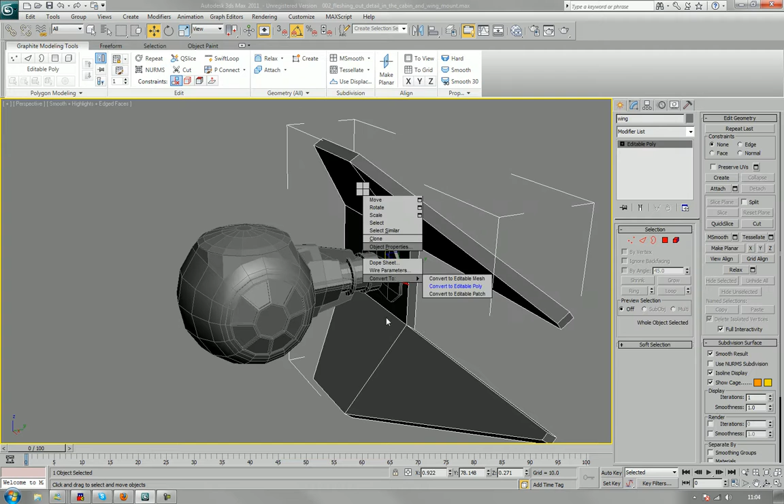Now then, what I'm going to do is hide this, and use this as a base plate for where I want the thing to reach, rather than building it off this.

I just want to look at this, because this part here is too high up. It needs to be brought down, just in line with the rest of it.

There. Slightly better. Now I can work again from this. Now there's a couple of ways I can do this actually. One of them is just to really duplicate what I've got over here.

So let's see what I can do. Shrink.

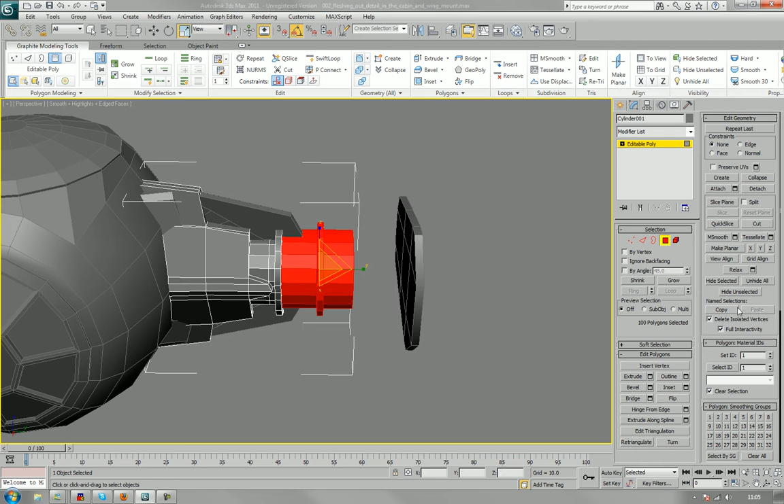It's actually quite a clever design, you see, this thing when it comes down to it. It's these two parts, just repeated.

Okay, so I'm going to shift this 90 degrees.

Incidentally, that's what most 3D modeling is. Blatant cheating. Oh yeah. And Zap Brannigan impersonations, obviously.

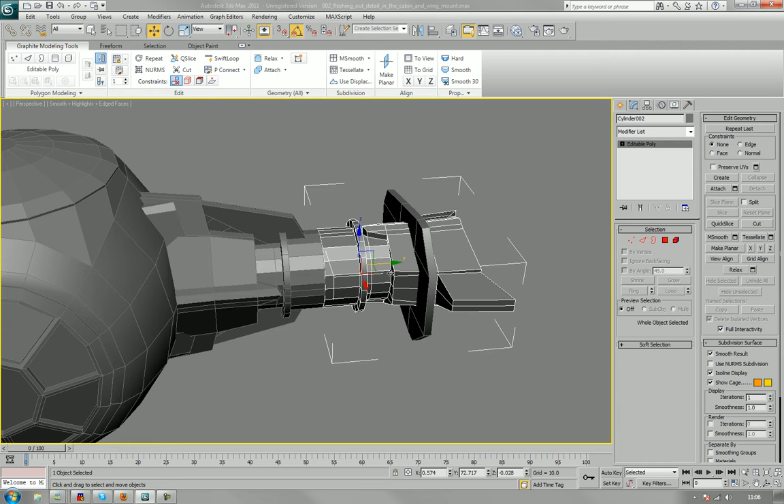Now I'm going to get rid of all these parts here, because what I can do then is just literally bolt these two parts here together, or even just make it into a sliding attachment if I absolutely have to.

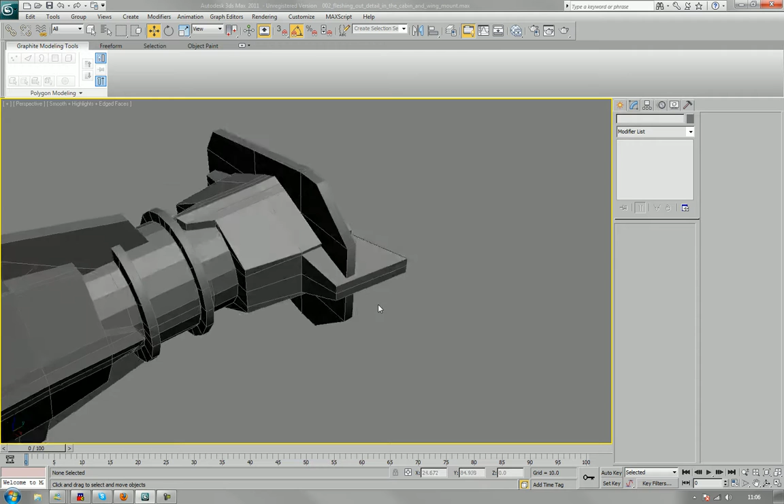Okay, now top viewport. What I'm going to do is just clean this up a little bit. So let me see.

I could do a slice plane, I suppose. For that to work, I need to select all those, and get my slice plane tool, which I rarely use, but it is massively efficient.

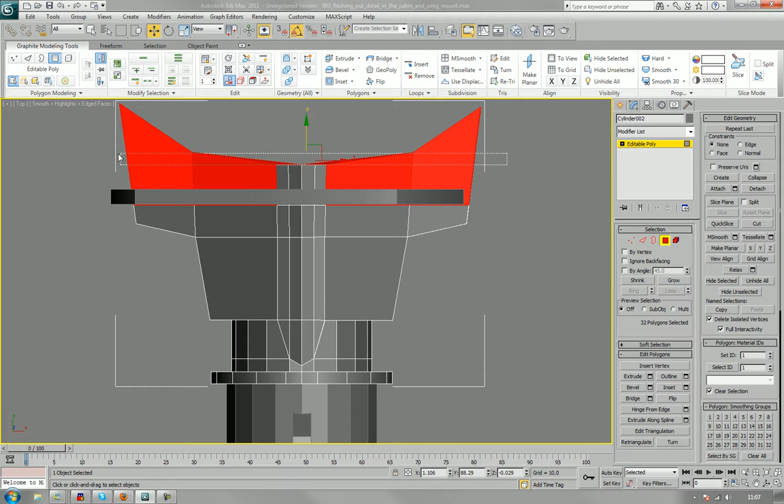Bring it to round about there, and just click slice, and turn it off. Then just get rid of all these leftover parts that are now useless. And ta-da, as they say.

Now then over here, I'm going to do a bit more tying up work.

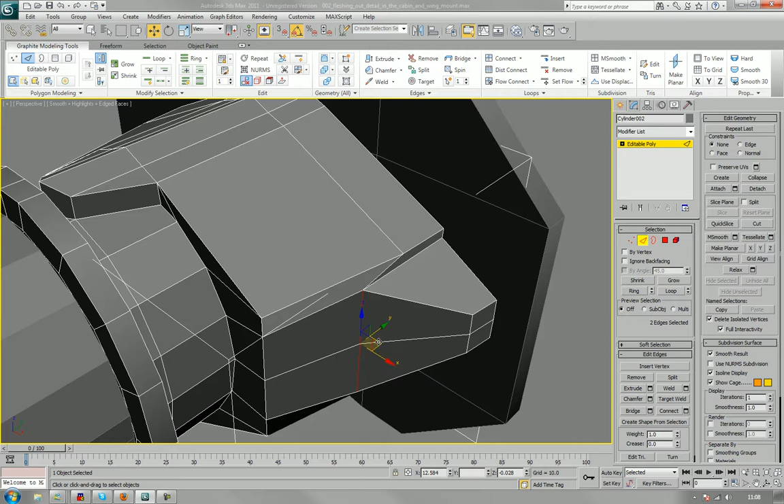Good thing is, I suppose, that you can go, oh no, this is a Generation 1 TIE Fighter, or this is a Beta TIE Fighter from... Just make something up. The only people who are actually going to notice or care will be rabid Star Wars fans. Unfortunately, there's an awful lot of those in the 3D industry, however. We all have our crosses to bear, I suppose.

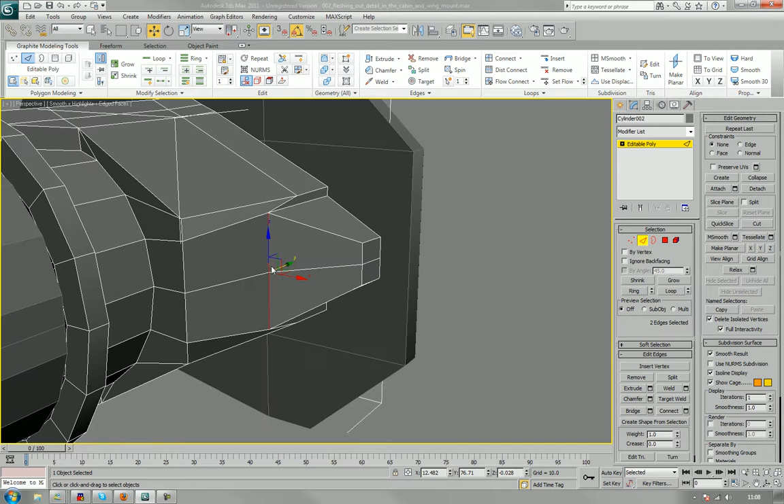That's right about there. Now, the thing is, if I move this forward, which I just have, the choice is either to inset that into there, but if I do, I've got to move that vert, or I'll do both sides together because it's fun.

I can move that to about there. Then just scale them in this way. And if I do that, I don't have to repair this part.

Because it still works. Yeah? Yeah. Good.

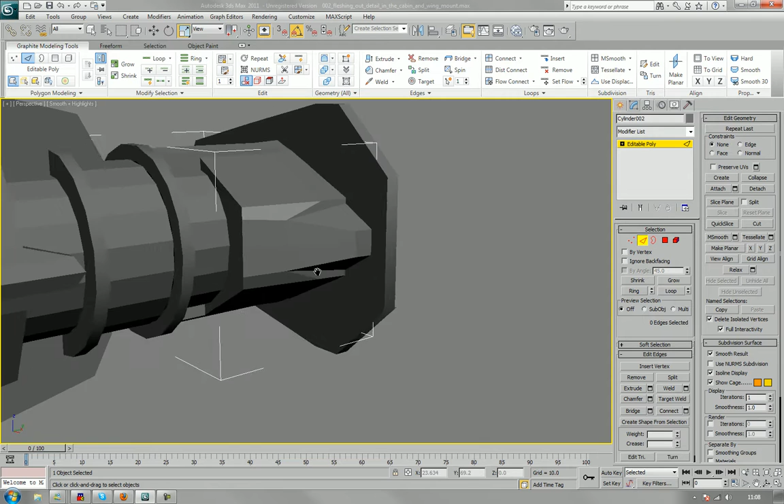Although what this does mean is I need to steal these parts here. So I'll just flip them 180. And then without holding shift, just 90. And then just flap them into place just down here.

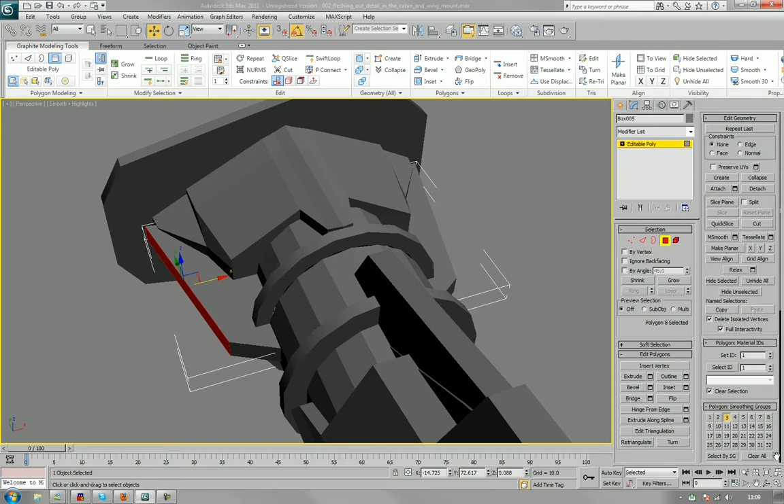Like so. Now, if I attach these two parts together, and I may as well, to be honest, I can then move this one into here. And this one here. Like so.

Okay, let's check these shapes out. Dem's some good shapes.

Now then, delete that and go down here. Now, obviously this is an open shape, so what I'm going to do is grab here.

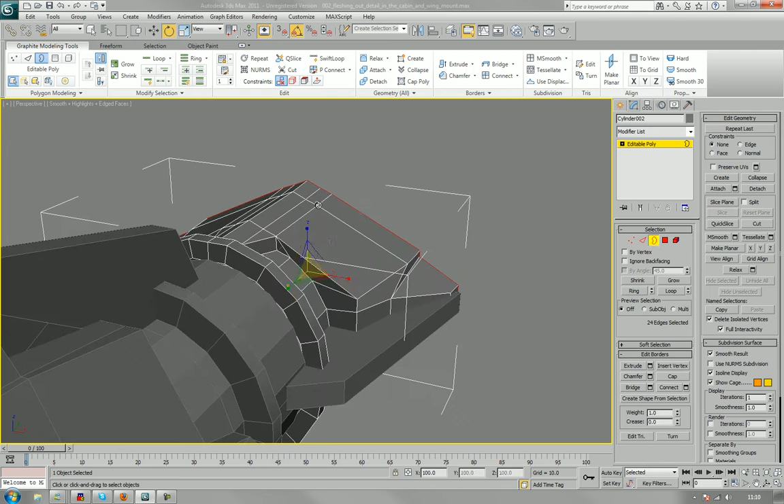Go to my correct tool, scale, there we are. Just going to bring that in like that, and then like that.

Okay, and this will allow me to do a bit more building that I need to do.

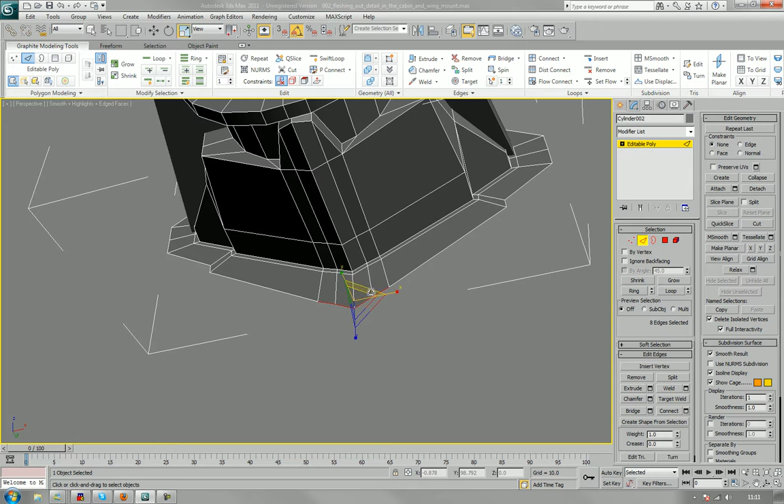Use Alt to deselect. I didn't like that method at first, where you have to use one key to group select and one key to group deselect. However, I actually really rather like it now. So, go figure.

How many polygons this will be when I finish? I haven't actually set myself a target, considering this is more of a kind of let's have fun modelling stuff set.

Okay, now over here, let's go straight into build mode. I could just use modelling mode, but I just prefer doing things this way.

I mean, extrude mode rather. Because it gives me slightly more control to be able to do things like that.

You want a very small extrude there. There we go. That gives me those shapes, which as you can see are kind of overhanging there, which is what I wanted.

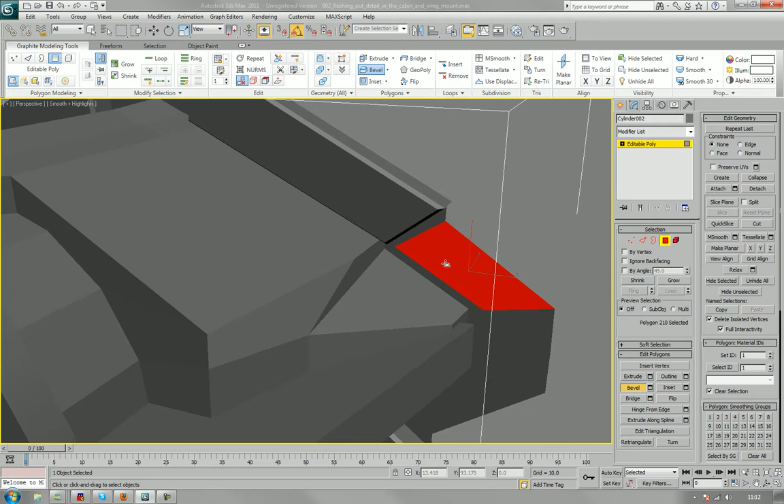Okay, now back over to here. Take these parts, there and there.

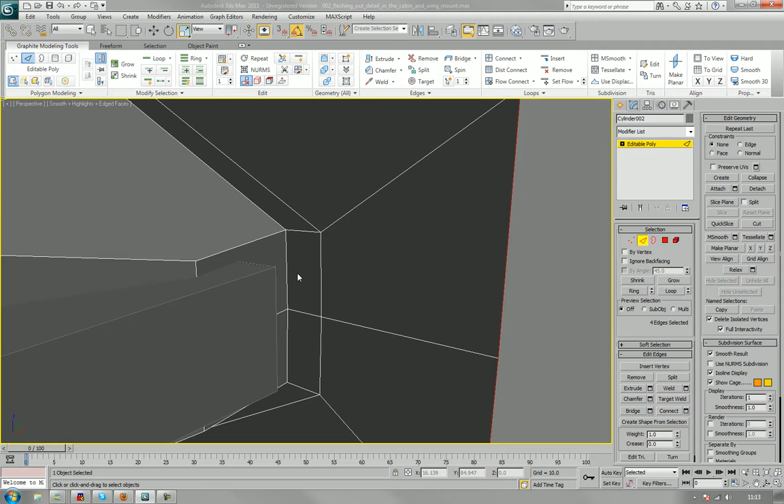Now then, what I can do here, just for some pure variance as much as anything, is go across there and do a connect. I'll do it on both sides, in fact.

Now it should connect in the middle. There we go, it did. Like so.

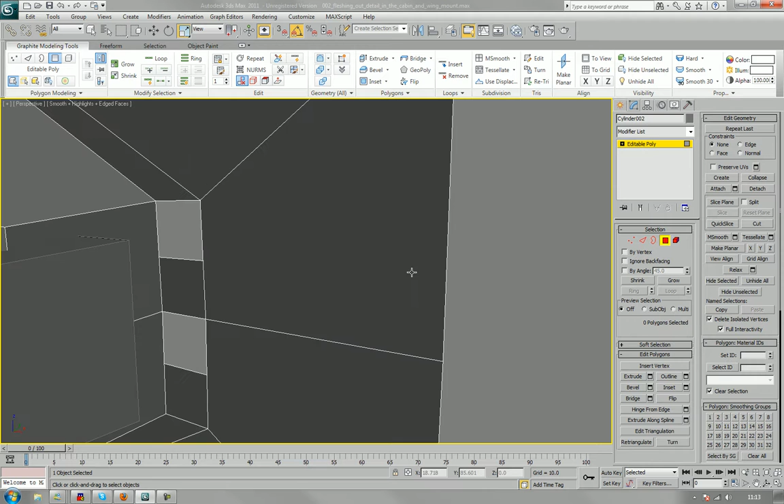Now then, depending on how straight these edges are, this will either work or not work even remotely. So let's find out, shall we?

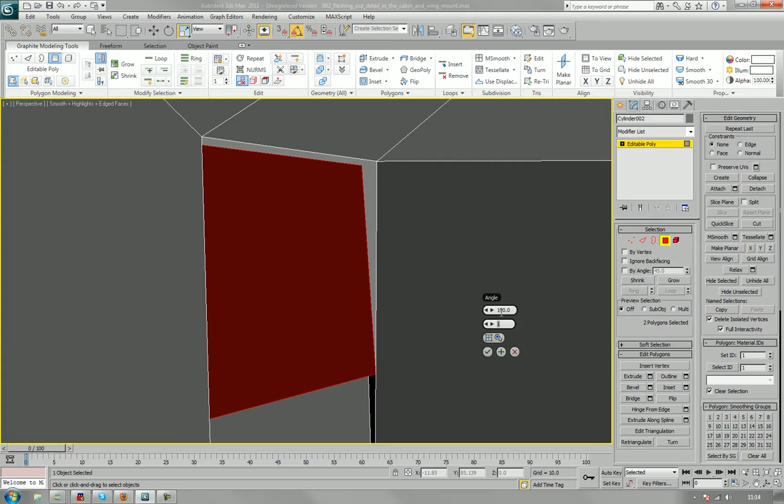And I'm going to use maybe 6 segments. Yeah, not especially straight. But that's okay, we can get around that too.

Delete these back ones off. Oops, deleted them all because I didn't click tick, because my caddy had wandered off.

Alright, now target welds.

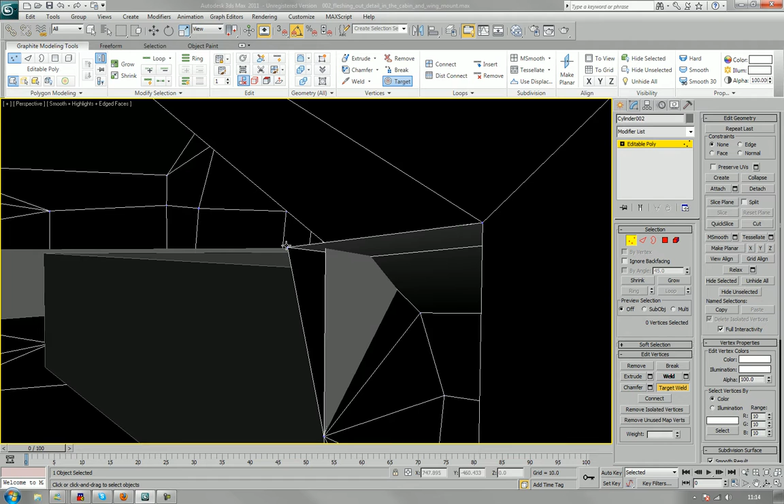Intriguingly, this one seems to be a lot more straight than the other one does. Or does it? Haha, no. Oh, dearie me. Oh, you. Never mind. Let's just undo that part altogether, shall we?

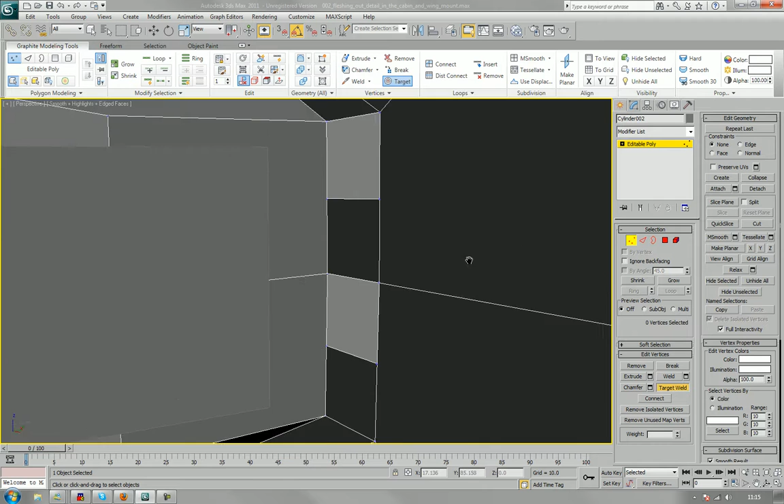In that case, we'll just use a simpler method of doing this. I'll leave those there anyway. Cylinder, just use the standard poly on poly method. Drag out.

Let me have a look. It's too many polygons there, so bring that down to about 8. Well, 90 and then 90, not 180 rather.

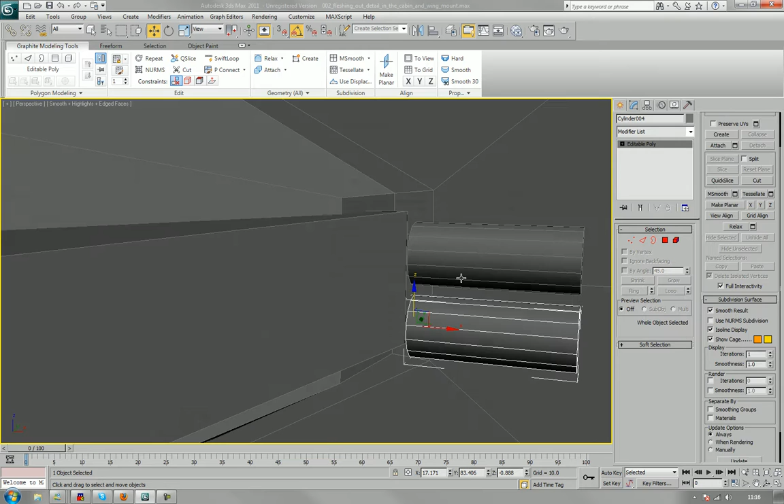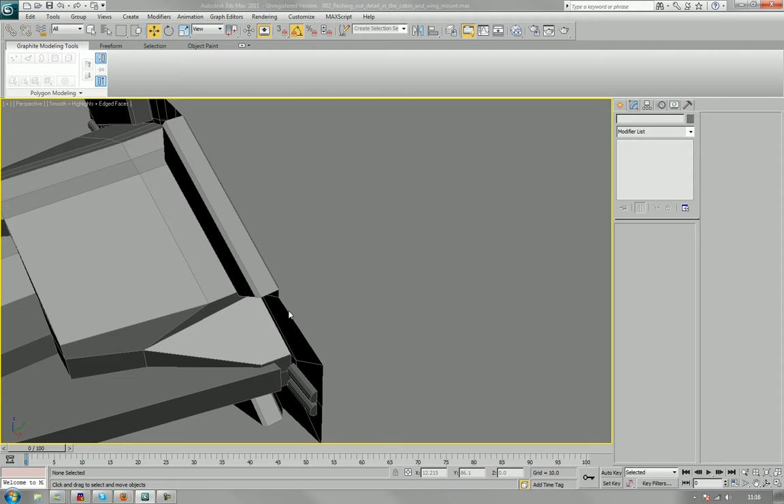An awful lot of busy stuff tends to go on in these models anyway. There we go. Now then, grab these and just shift it back again to there.

And don't be put off by complexity, like I say. These things are here just to make us better artists rather than to interfere with the fun you're having.

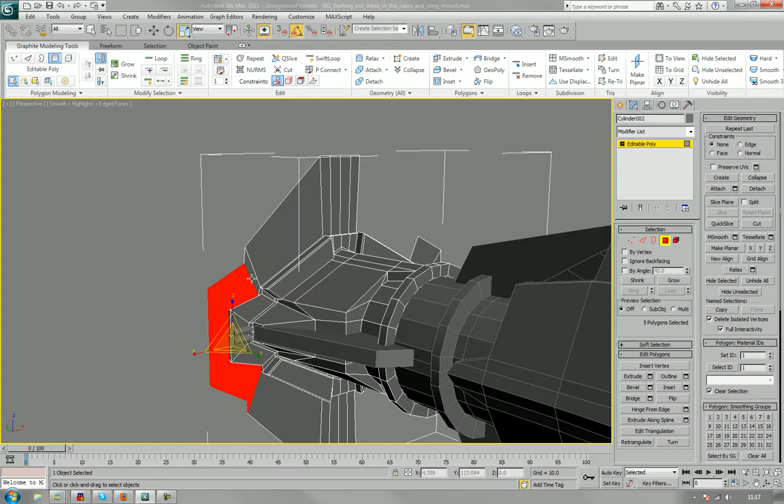So I'm just again looking at this shape, just bring it up a bit like that, just there. Now I need to clean up some of these edges, because we don't need all of them. Get rid of those ones, and these ones. Start straightening pieces in.

Moving to the point now where we're going to need the wing. See what I mean? Becomes kind of important at this point, because now we can see how this part is going to fit onto this part. And if these bits are too long, which at the minute they are, then we need to adjust them, like so.

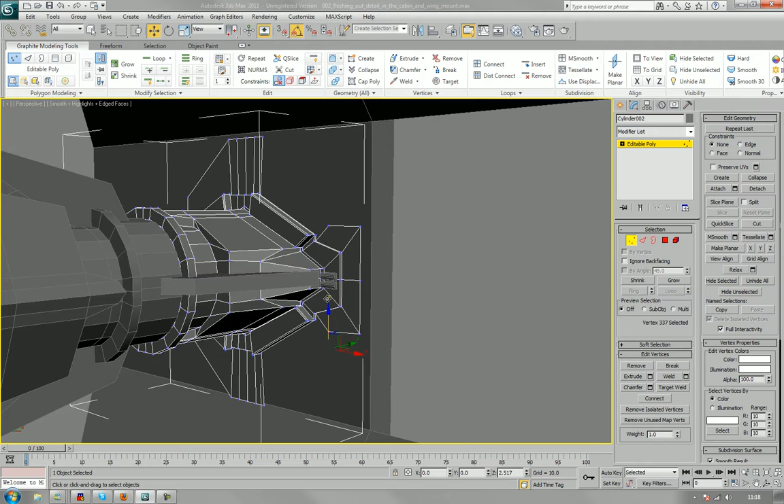Alright, now then. The part goes there and there. And let's look over here at this part, which I'm going to chamfer to give me that shape.

I'm not sure that shape's actually going to work for what I want, especially when I'm being stupid and can just delete these parts. Thought so.

Target weld these into here, eventually. It seems to be becoming a longer and longer process to target weld this into here. That's better. Right, we've still got these kind of bat ears going on.

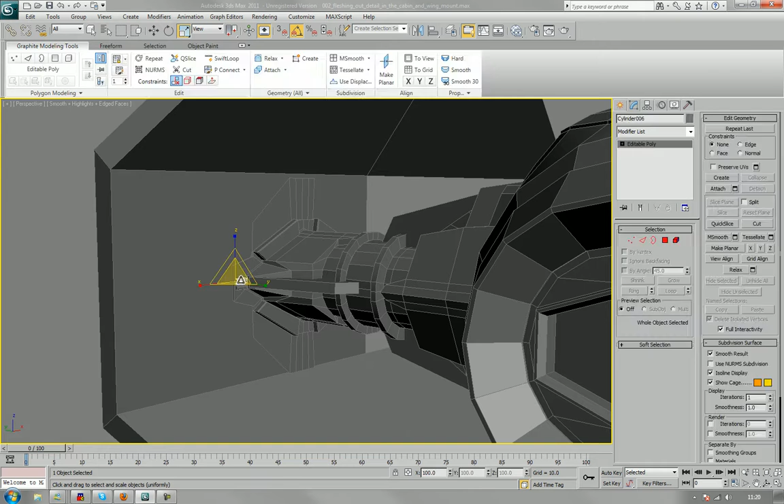Yeah, that should do. These parts here, I don't like. It's funny, I spent all that time making them and I hate them now. I want to make ones that are much better suited when it's time.

Now then, this goes through and out the other side of the wing, basically. So move the wing over here until it's time to attach it to what we're building. That's the strut that's going to go up the middle just there, you see.

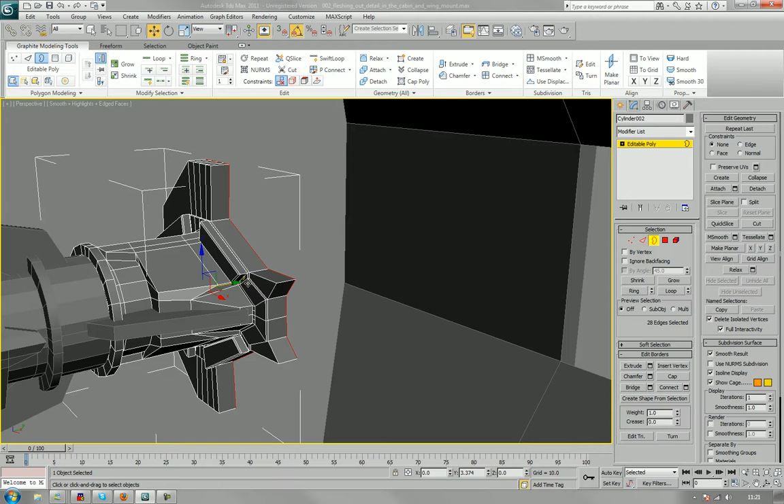Okay. Now then. I really need to close my email client. Now then.

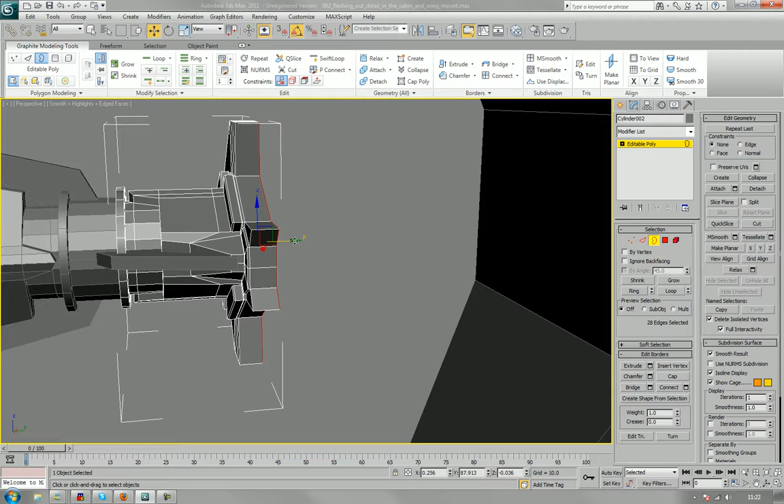Let's check that. Probably could do with being a teeny bit wider, but such is life. There we go. And starting to injure my brain actually looking at this thing, which is always a worrying concept.

Inset. And then a teeny extrude, so that I can do that, and then that, which in turn will allow me to do these.

Notice I'm using a cylinder rather than using a tube. I always tend to prefer to use cylinders in this kind of instance.

Okay, let's increase its radius. Okay, that should do. Thing is, you've got a lot more control over one of these than you have with a tube.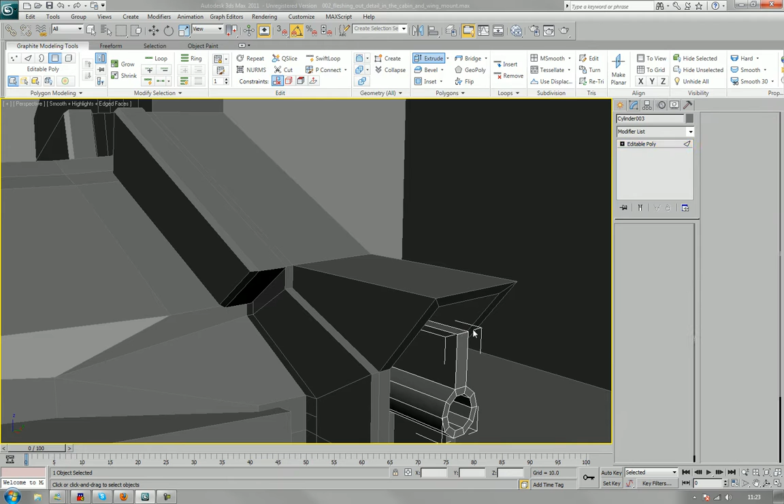God, I wish I had some more kippers left. I love kippers. So nice.

Right. I believe these are the targeting things. So, go figure.

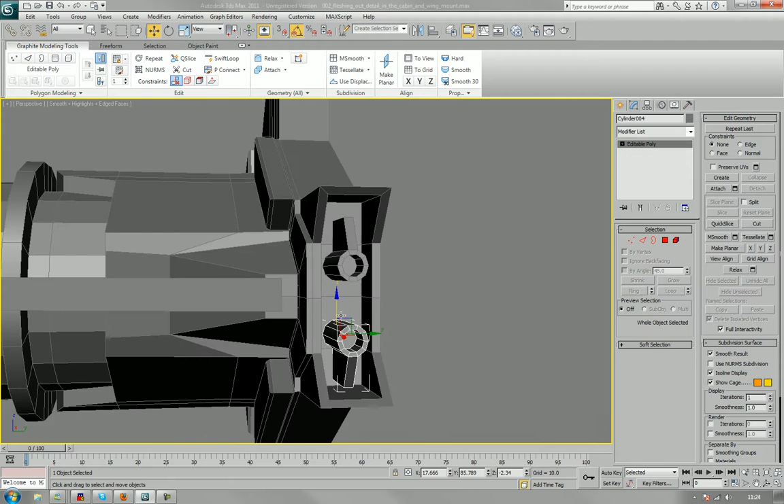Now at the bottom here, see how things come together now, even though we threw them together originally as just a rough scaffold so we could get our shapes and things. You'll notice that now that things are starting to come together, we're getting much more complex shapes that we're building separate to the scaffold.

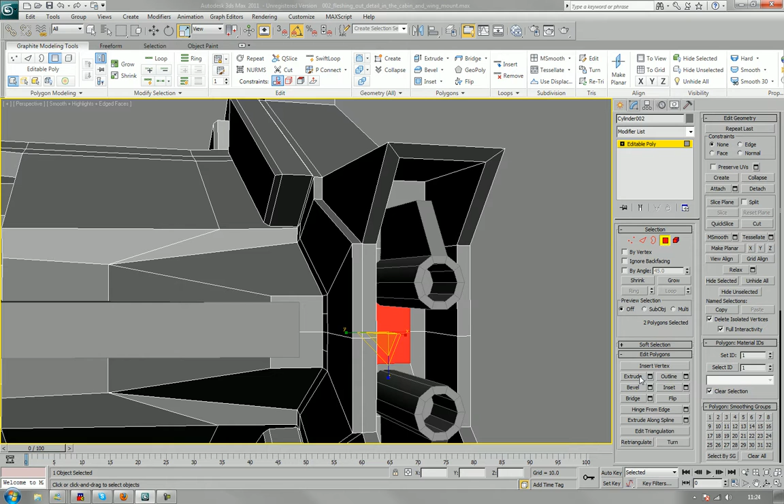I always think that part of a good scaffold really is just to give you the impetus to carry on with your model, because it's all too easy just to start doing little bits of it and then think, oh, I'm getting nowhere, why am I even doing this, I'm going to become a car park attendant. Maybe I'm being a bit facetious, but it's true. Not that you're going to become a car park attendant, but you know what I mean.

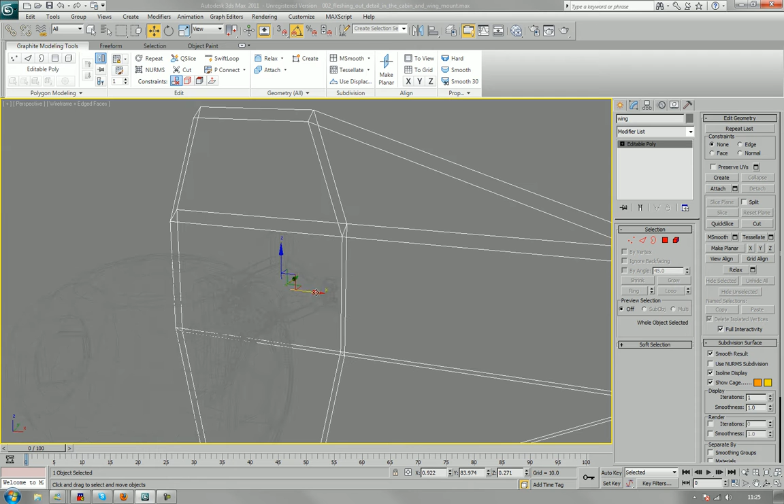That goes there. Starting to see how this goes together now. I hope you are anyway. That bit embeds in there. Now let's start looking at making this wing a bit narrower. There we are.

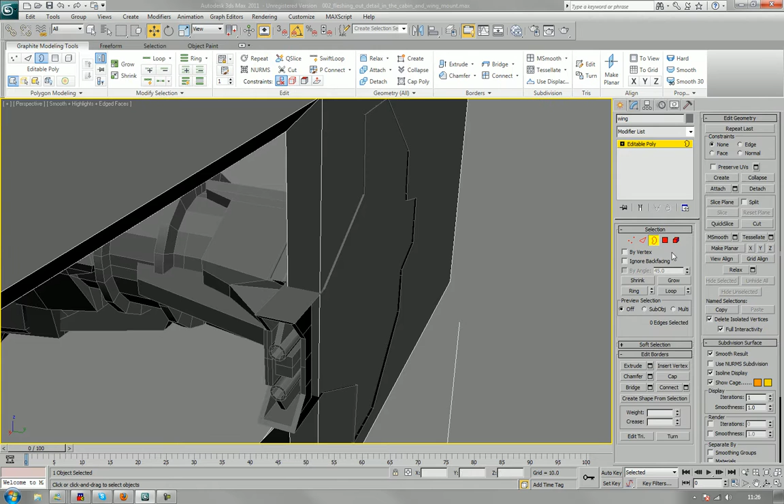Gives me a chance to work on deleting these edged faces here. Edged faces? What am I talking about? These borders, these bits of polygon. These bits, you know what I mean.

So I'm going to press Alt to deselect the bits I don't want wiped out. Alt and click. And that leaves us these parts, which I most assuredly do want.

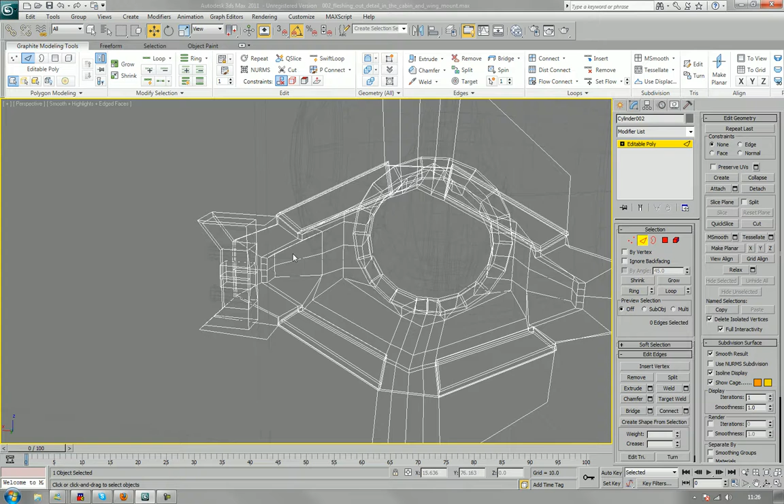Start off with a bridge here. And then that should make bridging this part a teeny weeny bit easier. Like so.

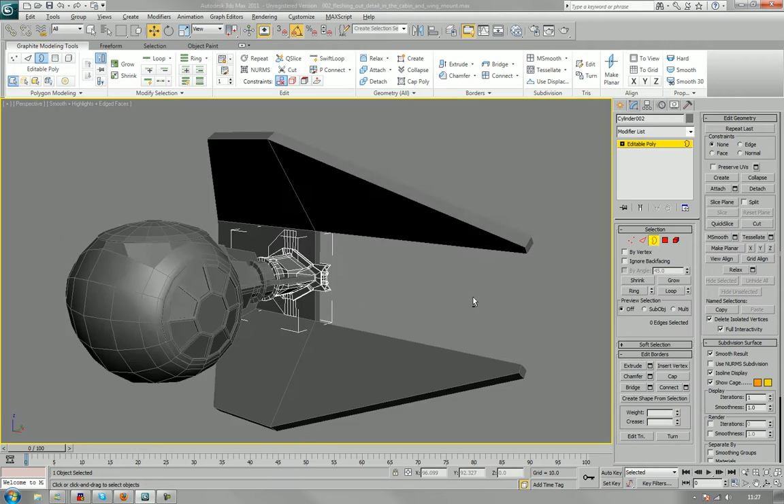Alright, I'm going to add these into it. Bring back. And now this gives me a chance to start working on the actual shape of parts to build.

So I can delete those, and those. Now we can see that these are essentially in the right place. So all I need to do really is straighten them up.

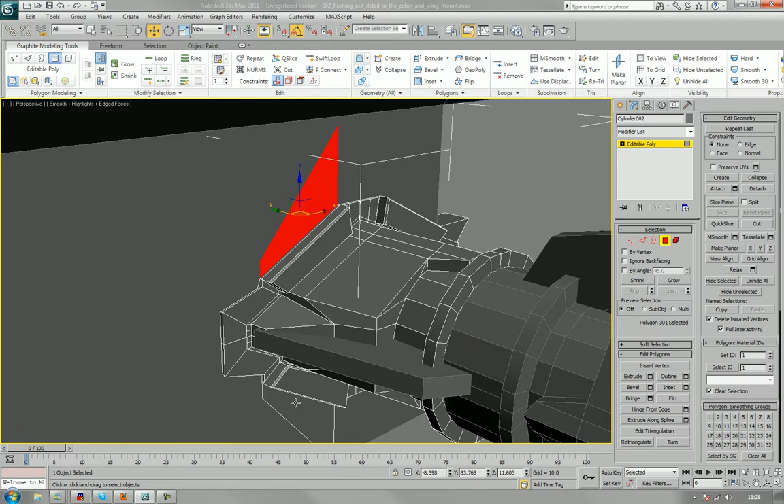Alright, go in there and there, and insert. Now everything I do, unless I'm making mad mistakes, I'm doing for a specific reason.

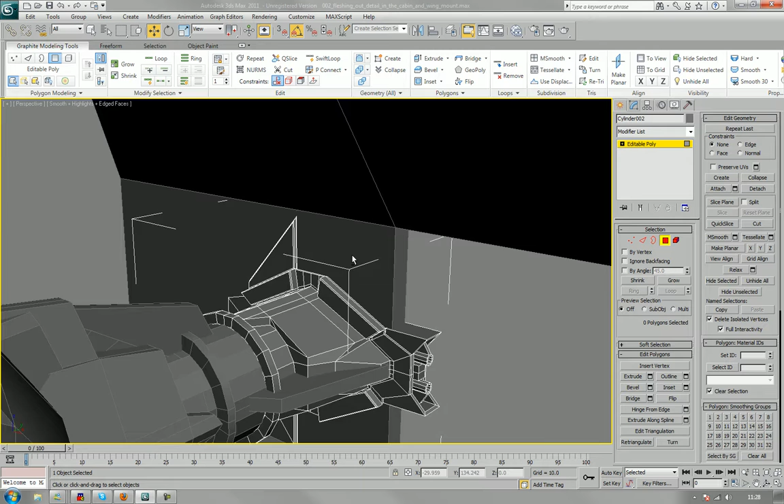So this is a patch or a panel patch. Now later on, if you come back and hyper detail your model, you'll add all sorts of gubbins and things, as my old mate Squid used to say. But until that time, we'll leave it as it is.

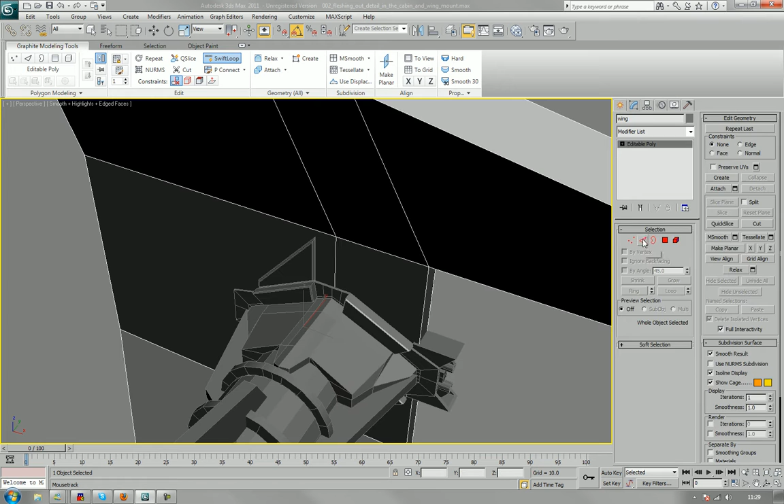Now then, I need to bring panels on this, so I'm going to use my SwiftLoop. Gotta love the way you can preview a SwiftLoop. There. Now I can select it using this.

I'm going to chamfer it a bit wide. Before I do though, I should probably select the other wing parts that I'm going to be using at the same time, because there's a few of them.

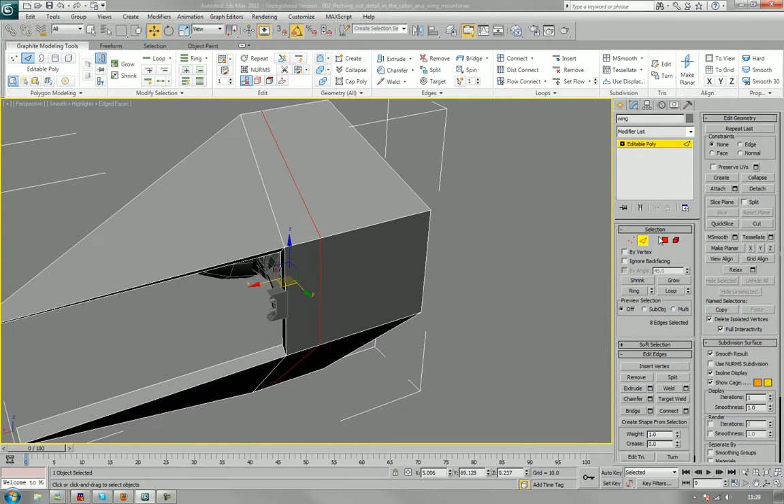So what I'm going to do is work on an inset value, and I think before I do that I should probably do some minor fixing to this as well. There we are.

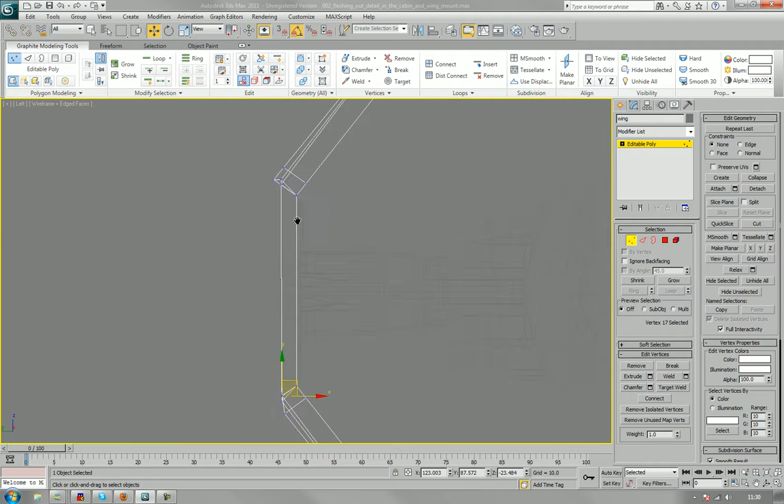Because we have to repair our model, obviously. Otherwise it ain't gonna work, as they say.

Okay, now same again down here. Just repairing the mess that's been left behind from all this fiddle-faddling, as they say.

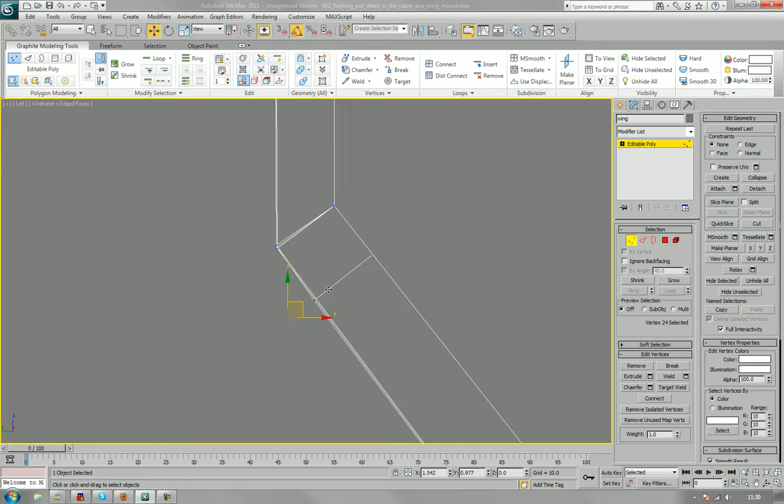There we are. Now, just to make sure that I haven't done awful things to it. I shouldn't have done that. No, that is fine. Okay.

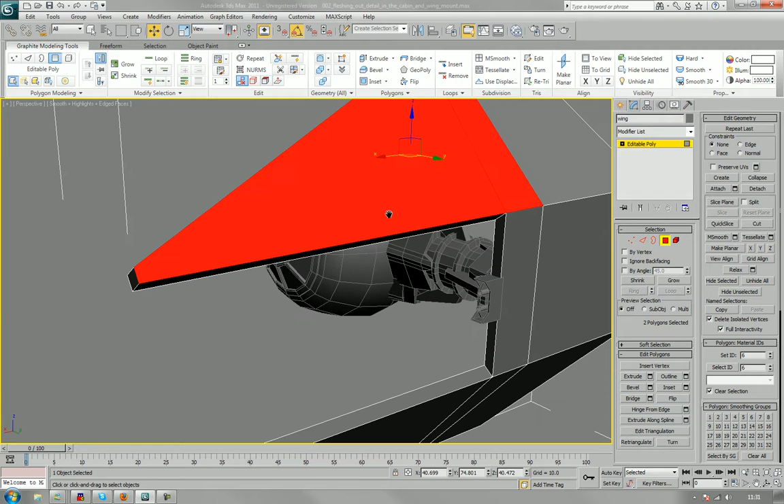So again, what I want to do is work on my insets that I'm going to be using. So that's an inset there, and let's set that value correctly.

Now then, I'm going to be careful down here in particular at our end pieces. I'm going to take off that piece.

On the inside, it's just that piece and that piece there, and that piece and that piece there, and then half of this piece at the back here because it kind of breaks down into smaller panels.

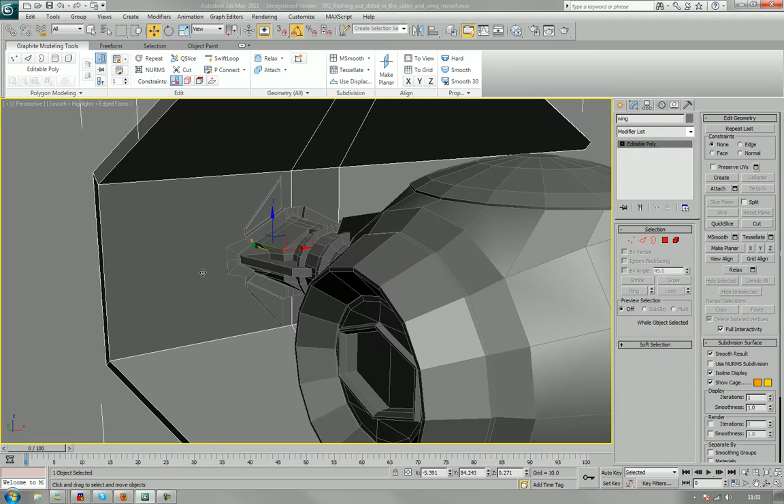So I think it's going to be in my best interests to break this down into its smaller panels first. I'll just isolate this part while I'm doing it.

So a quick connect straight across the middle there. No, that's not the middle, is it? Alright, and now I can inset and then just get those values correct the first time.

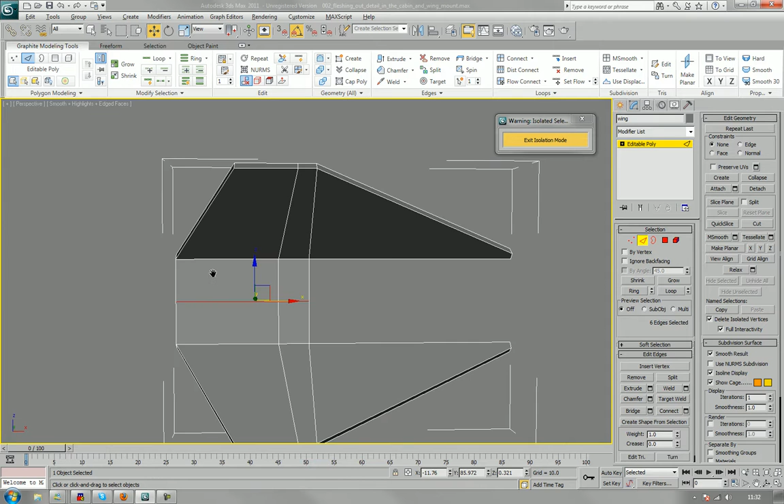Just checking these again. Just going to ensure it's making a big enough space where it needs to. Then again, I can manually move them, so that's not really an issue. Tick.

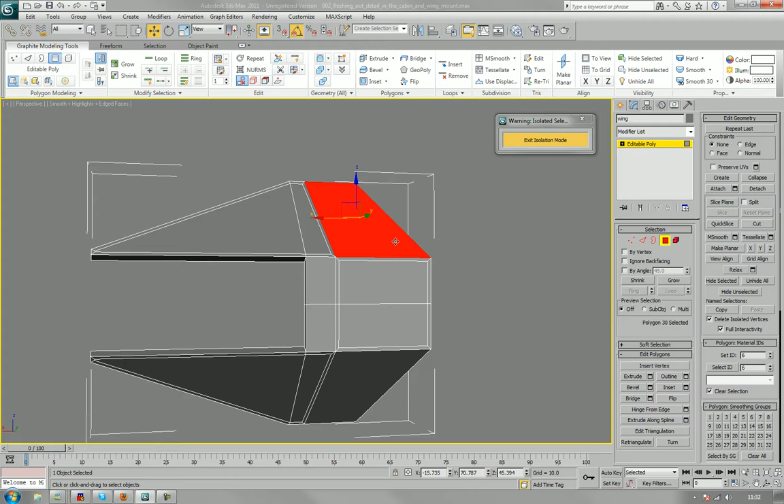Turn inset back on again. I'll do those separately in just a moment. Okay.

There's basically loads of kind of greebles, basically just greebles galore here. Presumably control surfaces and things like that, which I think is probably a mistake from a sheer ergonomic point of view if you think about it. However, I'm not going to fight with the Lucas fanboys, otherwise I'll lose and they'll come to my house, and we don't want that.

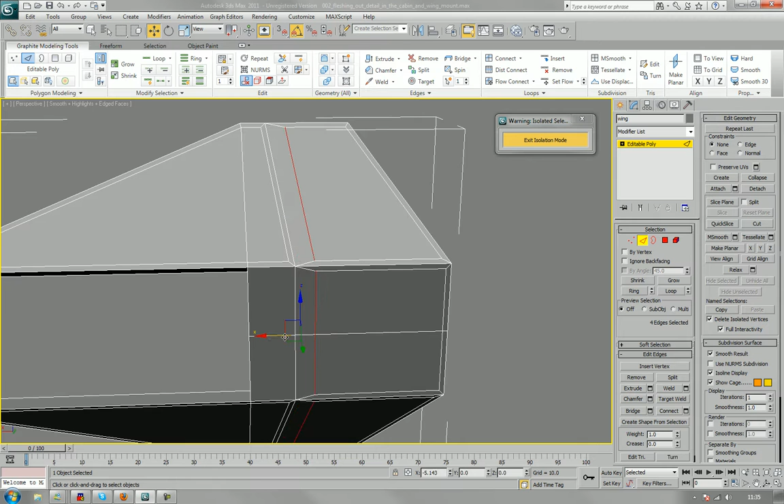Okay, so I don't know why I've got bloody Bon Jovi going round and round in my head at the minute, which is not great. I mean, sure, if you like Bon Jovi, that's cool, but I blame the game Rock Band. I haven't even played that for ages. For some reason, I can picture the drum track. Ugh, it's awful. Right.

So we've got our panels here, which is basically just containing a kind of crisscrossing thing. I'm not going to go mad and put trillions of polygons in, though, to emulate this crisscrossing thing. So what I'm going to do instead is just go into bevel mode.

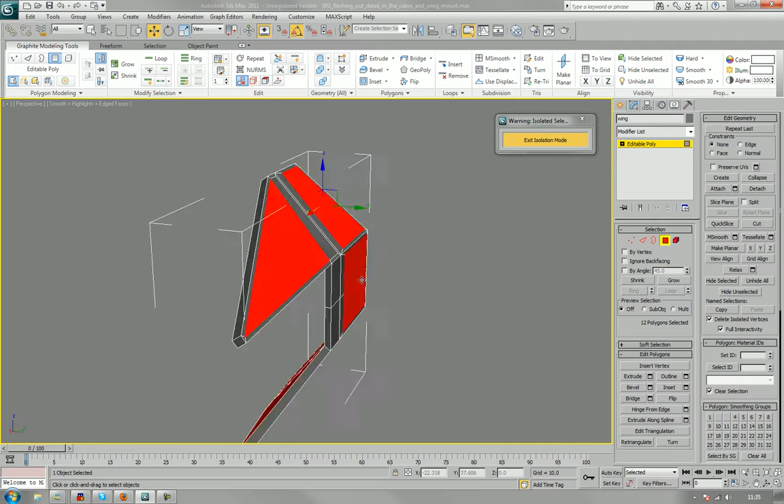And now here, see these? These are a problem for me. I've got to be very, very careful with these edge pieces. Now I can either blend them down into one, which I think I'm going to have to, or pretend they don't exist, which is a very, very bad idea.

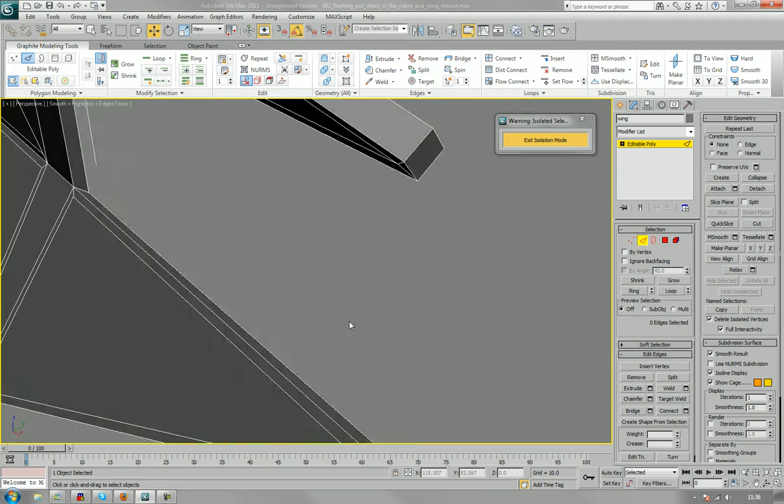I can collapse them into just one point, however, as you see. I remember I was discussing once with John back when he was in England, and he was telling me about how phenomenally complicated the collapse tool actually is, if you think about it from a mathematical standpoint. Apparently it's just like insanely complex. Bearing in mind John was a maths and 3D whiz who put me to shame, but if he says it, then it was probably true.

Bevel. And I suppose thinking about it, once you've got a selection of complicated ones, it's having to do quite a lot of complicated calculations to decide where it's going to collapse in how, isn't it?

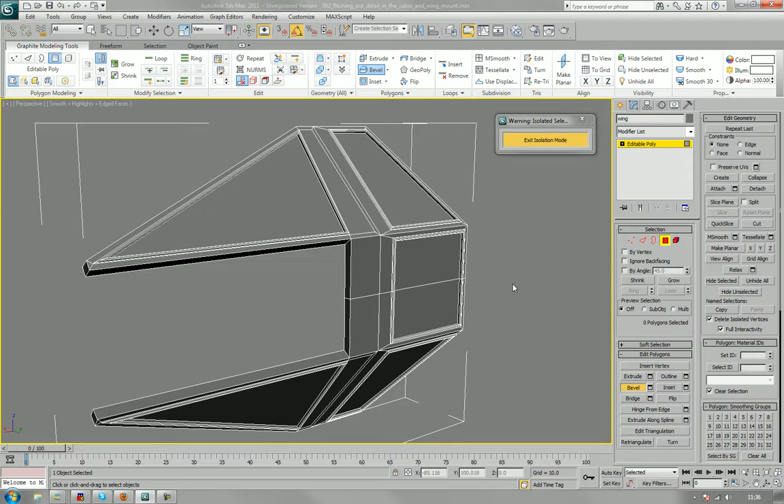Alright. Exit isolation mode again. Did that fit in place? Nearly. Nearly. Well, that's okay, we can fix that then.

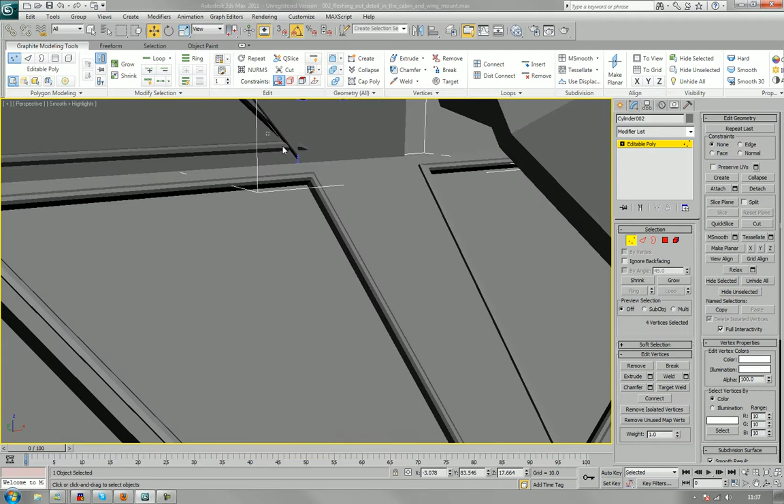Okay. Now then, over here, let's go into this part. Ring. Do a connect. I'm going to chamfer this wide.

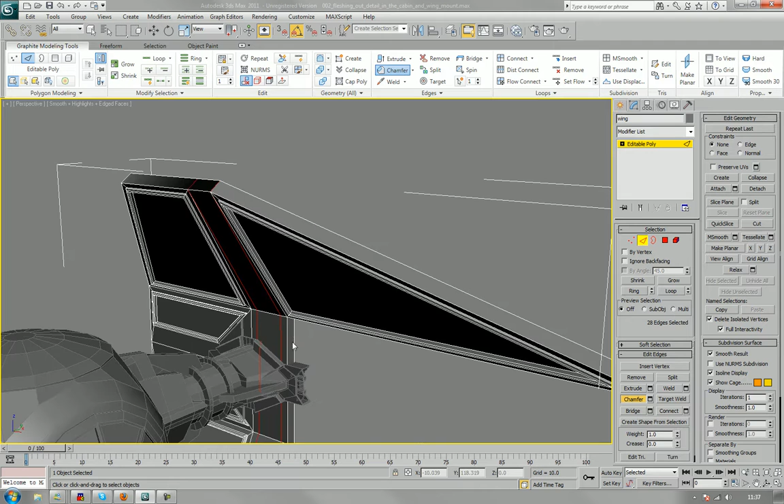Let's have a look. I don't want too much space at the front, although there should be a bit, so I think in actuality I'm going to have to move some of these corners here.

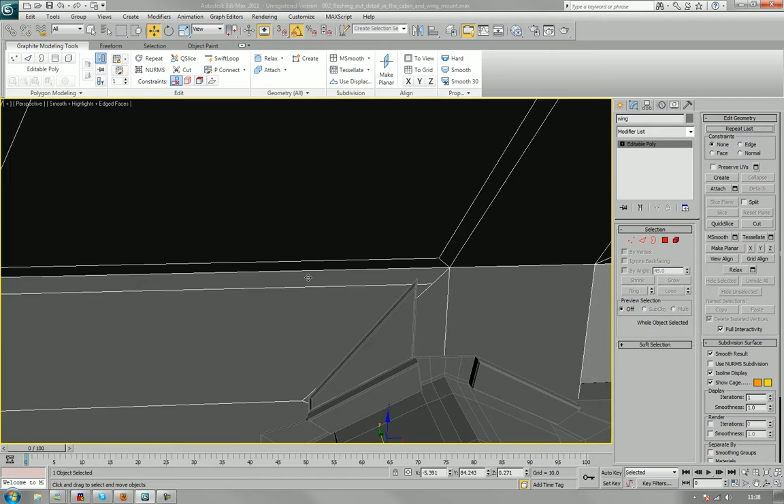See how far back we can go. Far enough, people, far enough. Excellent.

That means I can bring these back to around there where they need to be, and then drop back into this again.

Down in there like that, and then down. There we go.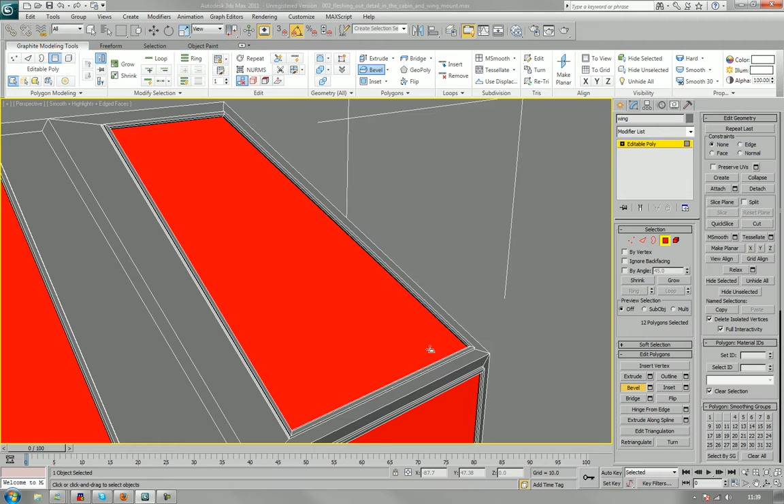Oh, thank God, I did unpause. I had this sudden vision that I was going to look at my pauseometer and it was going to tell me sad things that would make me a very sad panda. Pardon me.

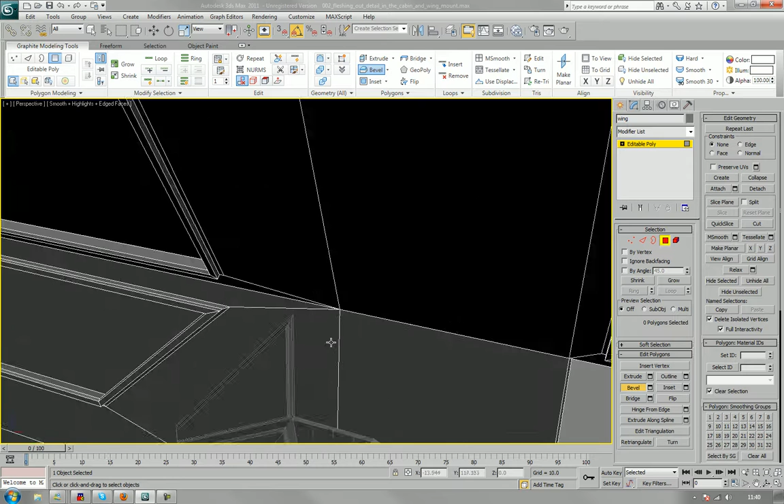Okay, that seems fine. Next, basically what I'm going to do now is go here, where this part is, and I'm going to use this to create the struts, because that's what it's for anyway. Go on the other side too.

So we can get the height of the strut from that, like so. Now then, I'm not sure if I can drag out an edge here. Ah, good, I can. That's going to make things a lot easier here.

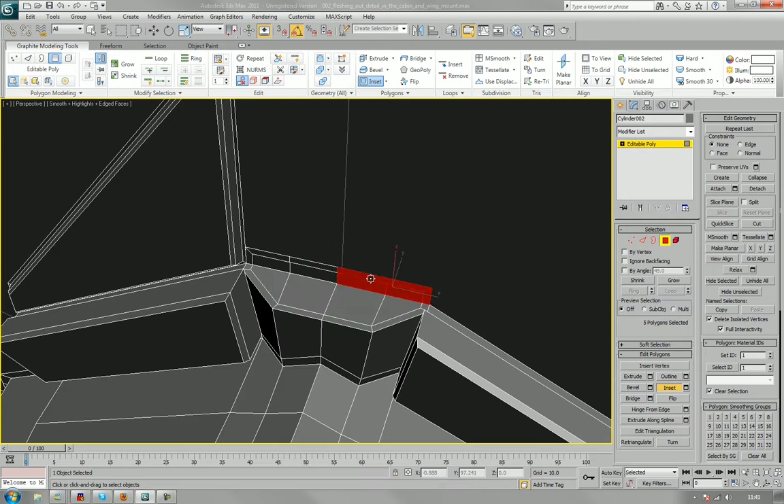So what I'm going to do is drag that out, and this is just temporary. Temporary? Yes, because then I can do an inset on this, like so, and then delete these parts. And I'm still left with this nice part here.

You get where I'm coming from? Oh yeah. So, I'm going to extrude this until I get there. Okay, now.

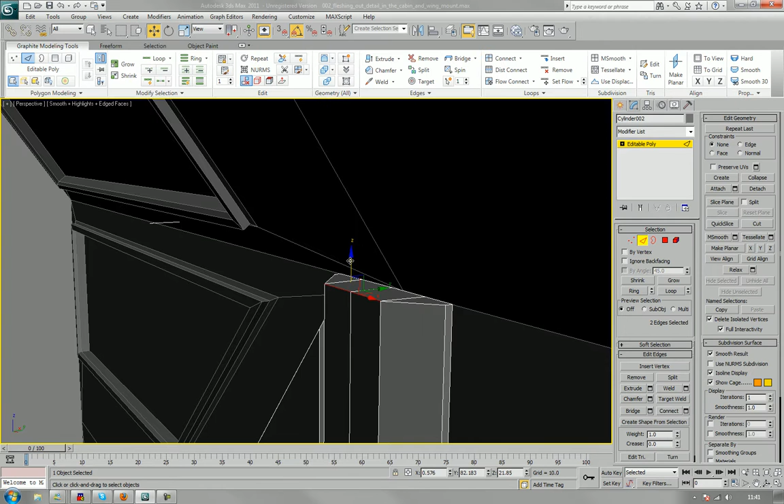If I twist it, you'll notice I lose some definition here, so it's easier bringing that back there.

Now I'm going to need to cut there to there. Okay.

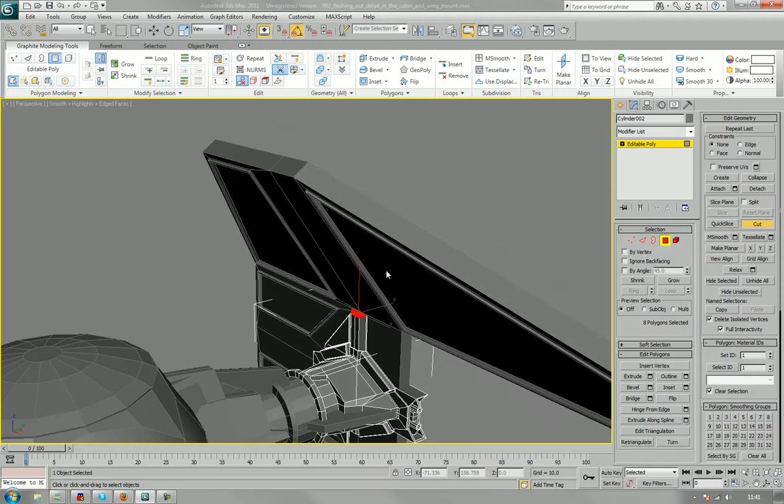Next, do it just a random extrude, because I'm just going to pull this up. Actually, no, not like that, without holding shift. I'm going to pull this up until we get the intersection point just there.

Okay, now, as you can see, this isn't going in the right direction yet. Now it is. That works for me.

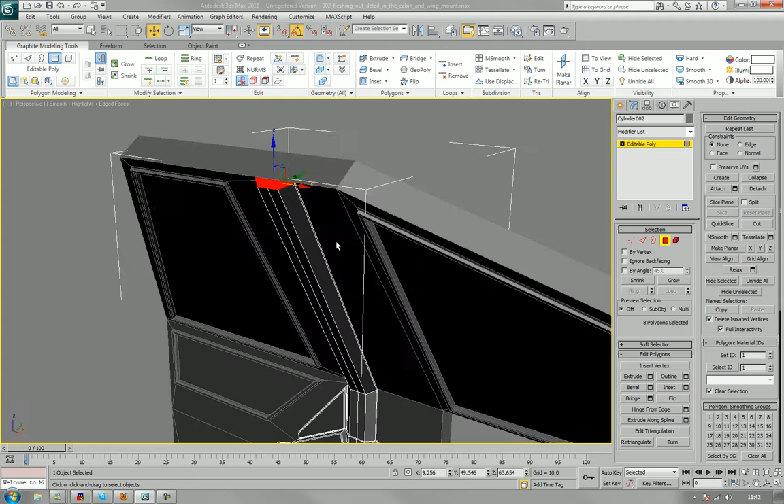Grab these two parts and just bring them in a bit.

I mean, there's tons and tons of wires and cables and all sorts of crap you can run down the inside of your damn TIE fighter, but I'm not here for the entire month working on this project. I'm here showing you how to do it now. And that's what you're going to do, work on it now.

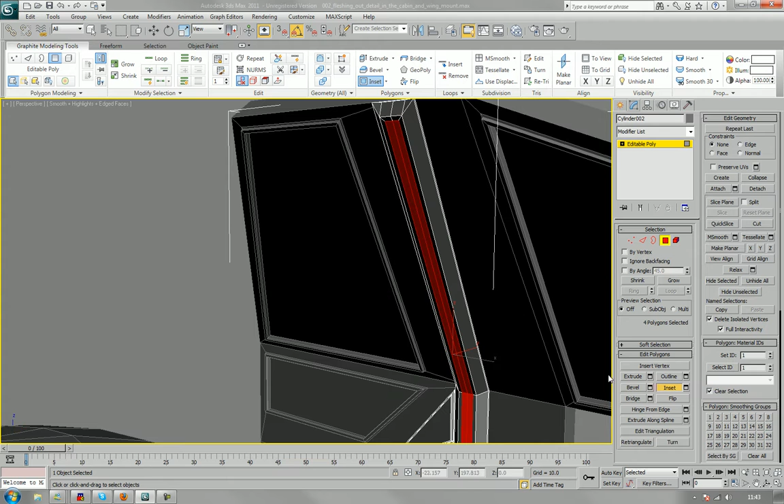Nonetheless, I can show you how to make some damn cool things, so that's alright. Just for God's sakes, don't go posting on the forums of Sci-Fi Meshes.com until you're sure you've made a good model. Even I'm frightened of posting on there. I'm a tutorial author, I know I'm a fairly good artist, but my God, those guys, they've got some talented dudes on there.

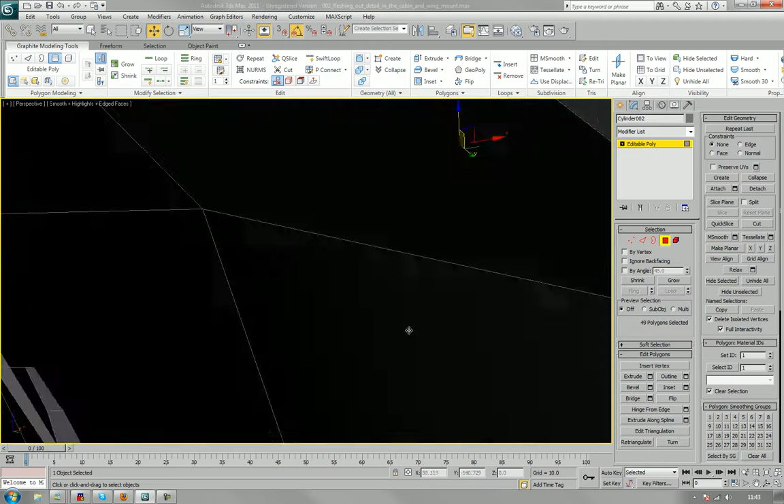Okay, let's grow that. Should bring it down all the way to here. Grow it again, and this means now I can detach it.

Now, obviously, it's facing in the wrong direction, which is a bit of a pain, so I'm going to detach it just as a clone.

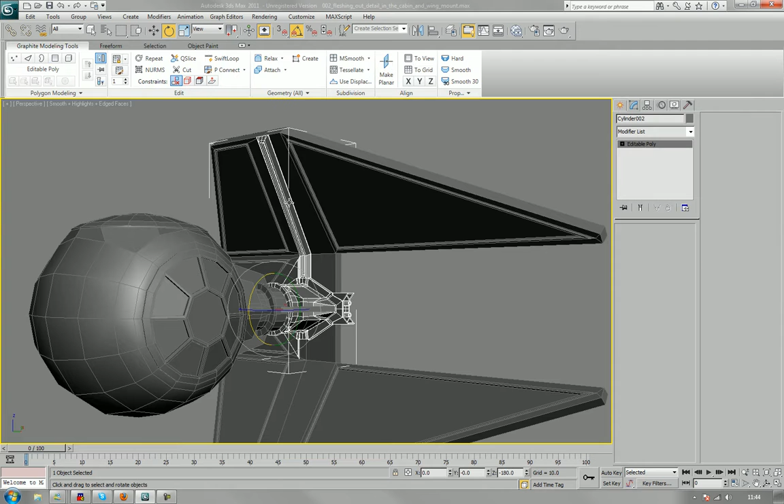And then with my clone here, once I've selected it, I'm going to mirror it, then I can choose which axis I want it on, which is that one. Once I've mirrored it, I'm also going to go down to my utilities panel and reset it, so it turns itself inside out. Convert it to an editable poly.

Select it all and flip it. You'll be glad that you did. It makes things a lot easier. Okay.

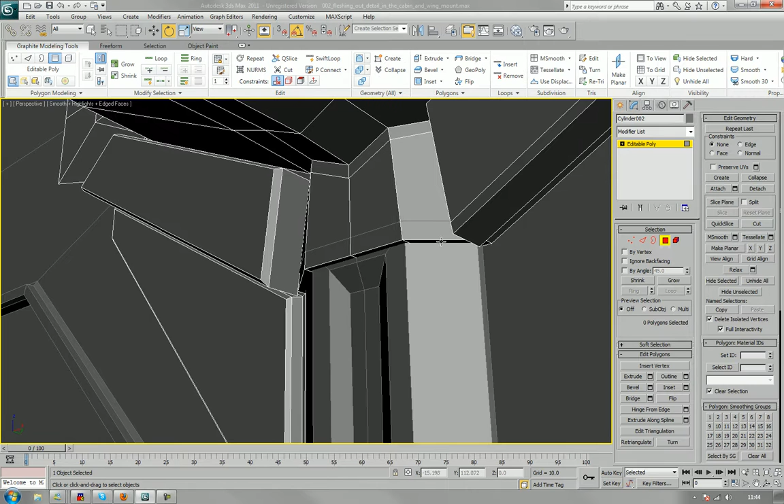Now this one. If you want to attach the two back together again, you just got to go in here and basically deselect these parts. That's if you want to. You don't have to, you don't feel it's 100% necessary if you don't want to.

Okay, and that gives us this shape here. Now, what I'd like to do is basically attach these parts together, the parts that make up this part of the wing. You notice there's two, there's the inner wing and the outer wing, and how they kind of fit to each other.

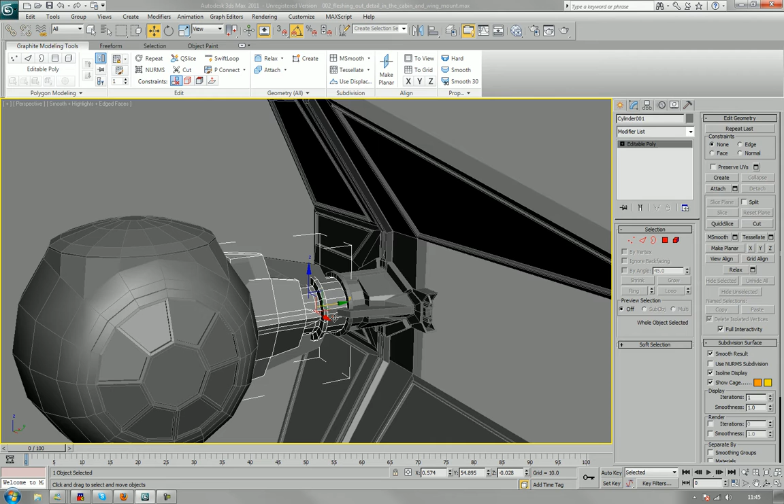So those are now part of this. I'm not going to attach this yet because I need to copy it, but I'm going to attach those fins to it.

Alright, and with the fins attached, could probably do with bringing this shape down a bit more. Oh, it'll be fine. Now then, I'm going to

Just make sure I've got everything selected that needs to be selected. What's this? That's the old piece, isn't it? Shall we have a look at it? See how it compares now.

See, fundamentally it's similar, but we don't need the scaffold anymore. Now all I need to do really is just grab these parts and just use this. Stuff it on the side.

Okay, and that looks much better now that we're coming to the end of part 3 on how to rough out this piece. Okay, so I'll see you in the next part.